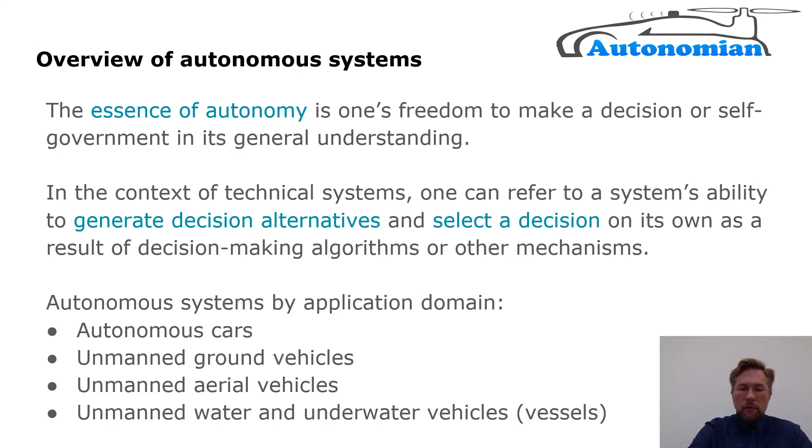First of all, let's discuss autonomous cars, which possibly are among the most anticipated technology currently being developed. Self-driving cars or trucks, in their essence, are those which are not piloted by a human driver, meaning they possess a possibility to make decisions while the car is driving without involvement of the human operator or driver. It usually combines dedicated software, dedicated sensor systems, and control decision-making mechanisms.

The main data processing steps, which is a crucial set of steps to achieve a certain level of autonomy, are the following. First of all, mapping, which is among the most fundamental abilities of autonomous cars or autonomous vehicles in general — its ability to build a model of a surrounding environment where decisions will actually be made and where the future actions of a car will be modeled.

The next point: since cars are heavy vehicles, they are related to potentially dangerous situations for surroundings, including pedestrians, other cars, or static objects like traffic lights, traffic signs, and other objects. So the data should be processed in real time, which means it's a general ability of a vehicle to generate a decision within a certain limited time interval.

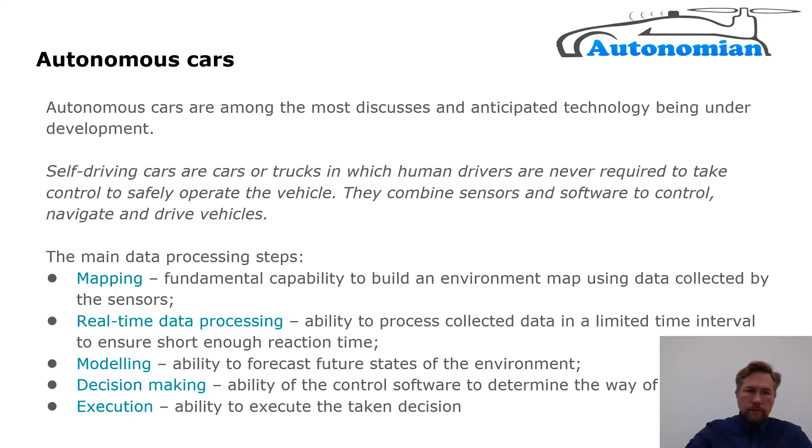Environmental footprint is another consequence of heavy use of autonomous cars, which might shift both to increased footprint due to increased mobility, or decreased footprint due to use of smart grids, energy grids, or shared car services.

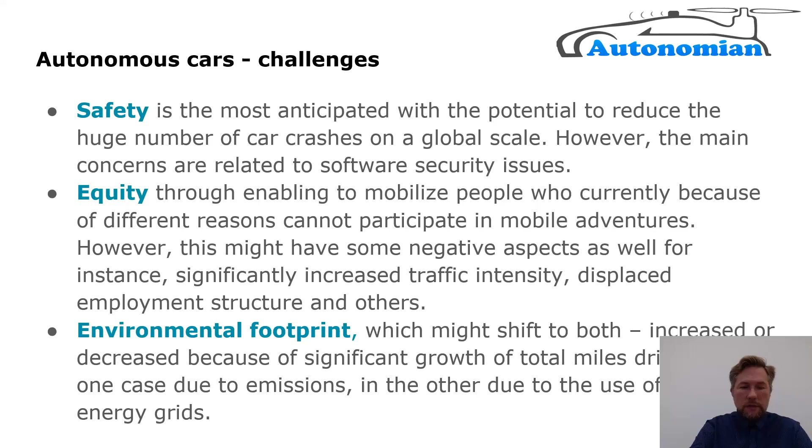Unmanned ground vehicles: generally, we refer to unmanned ground vehicles as autonomous mobile robotic systems. Their typical applications are military operations, which are related to potential harm for human health, and logistics, which are potentially related to monotonous work done by autonomous robotic systems, like delivery of goods within a certain territory or area.

Industrial cleaning, which potentially could increase both cleaning quality and decrease monotonous work for human operators. And agriculture and horticulture, where again we could use mobile robotic systems to increase both productivity and quality.

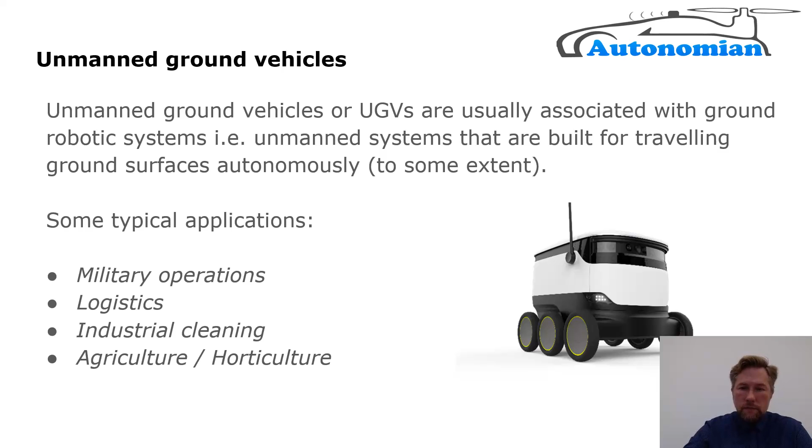Unmanned water or underwater vehicles or vessels. Usually we associate them with typical applications like military, including security, patrol and combat vehicles, and commercial applications, which are ferry and cargo delivery ships, even on an intercontinental scale or locally within shallow waters.

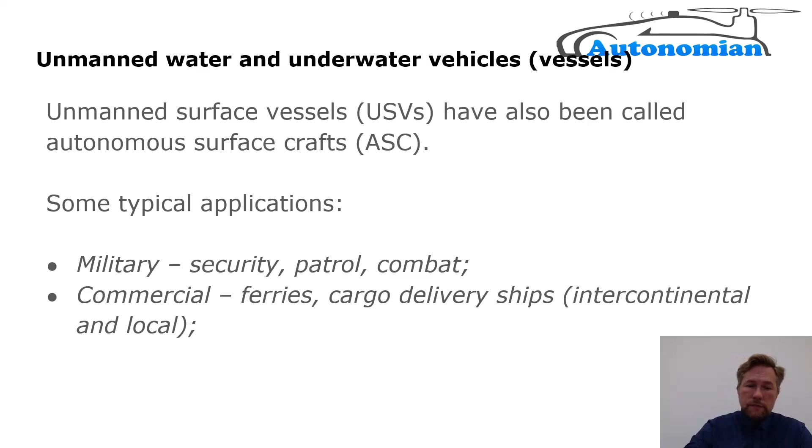Autonomy as a phenomenon is very complex as a concept. We're going to discuss a few of the most significant aspects of autonomy as such.

Due to many reasons, we need to measure the level of autonomy and to quantify it. First of all, depending on autonomy level, the system owner might expect a certain performance or functionality — related to the functionality, market potential, and expectations of the owner or operator of the system. For example, we expect our car to respond in a certain way to our control inputs.

Due to different system applications, regulations might differ, and the same applies to different levels of autonomy. Regulations might be different for fully controlled systems, remotely controlled systems, human operated systems, partly autonomous systems, and fully autonomous systems, which is related to security, functionality, and safety in a wider sense of those words.

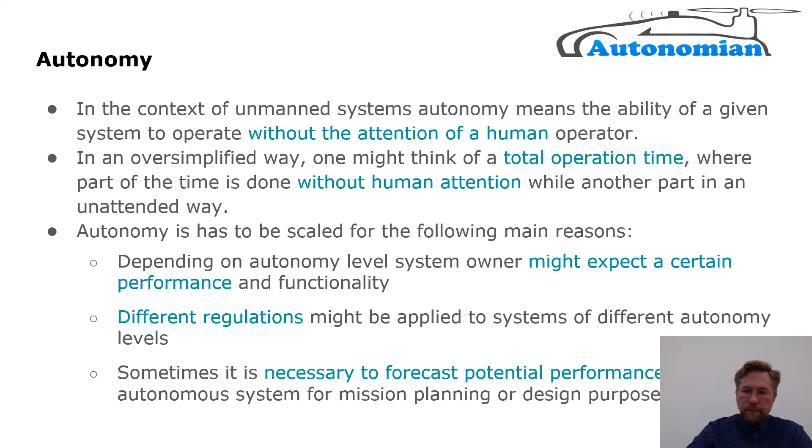There are several earlier attempts to describe or quantify autonomy. First, a model called ALFUS, which provides a framework for combining tests and metrics to assess autonomy of an existing system. By going through a series of tests, we can quantify the level of autonomy and operation.

Performance during those tests is how we assess the overall level of autonomy and performance. NCAP, which is non-contextual autonomy potential, provides a predictive autonomy measure relying on tests before the actual system is used. It means we can examine the system design and system complexity, and provide those measurements as input to assess autonomy before the system is applied.

The last one is mission performance potential, which differs by the following assumptions. The first assumption is that performance does not necessarily increase gradually as autonomy level increases. There are lots of examples where increased autonomy causes a drop of overall performance within a certain mission. So performance of the same unmanned system can vary from mission to mission, meaning the performance under a certain autonomy level depends on the particular mission where the system is applied.

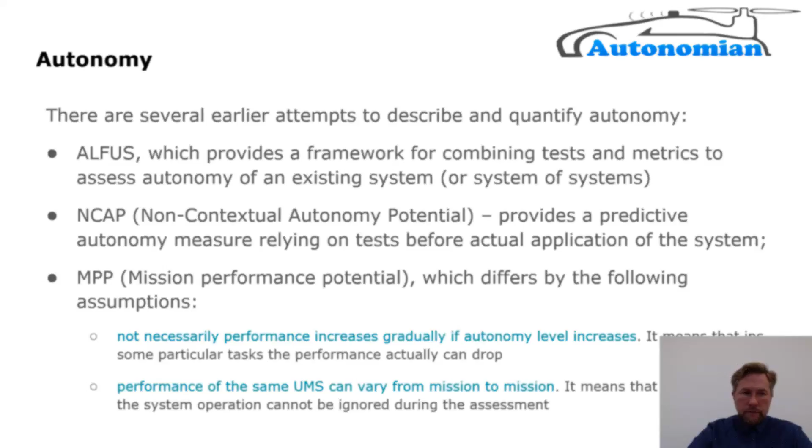There are several organizations which provide different levels of autonomy. The first is SAE, which provides autonomy levels for self-driving or autonomous cars.

There are 6 levels. Level 0 means the overall operation is human operated, so the human driver is watching over the full operation mode of the vehicle, while level 5, the most autonomous one, means the system provides full autonomy and a driver is not needed at all—the driver is more like a passenger. Depending on the particular level, there is a split of functions performed by the driver and those performed by the autonomous vehicle itself.

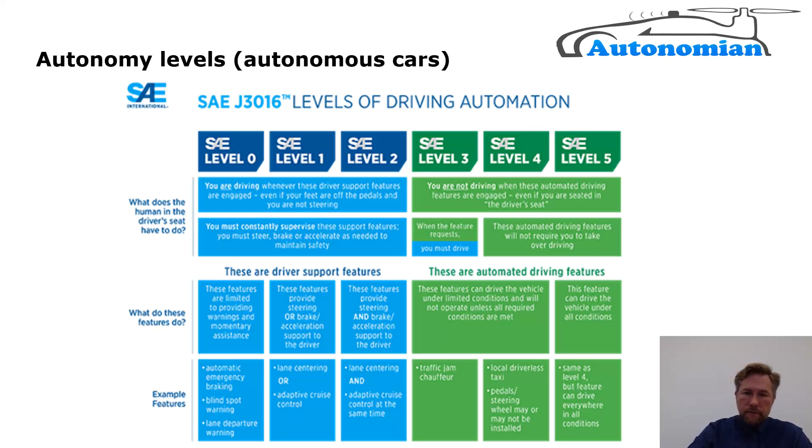In the drone world, there is a different scaling. However, there are also 6 autonomy levels, which also start with no autonomy, meaning the vehicle is driven or controlled using remote control units at a distance by the pilot or operator. The fully autonomous mode means that during the whole operation time the system makes decisions on its own, and the drone is fully autonomous, requiring zero attention from the human operator.

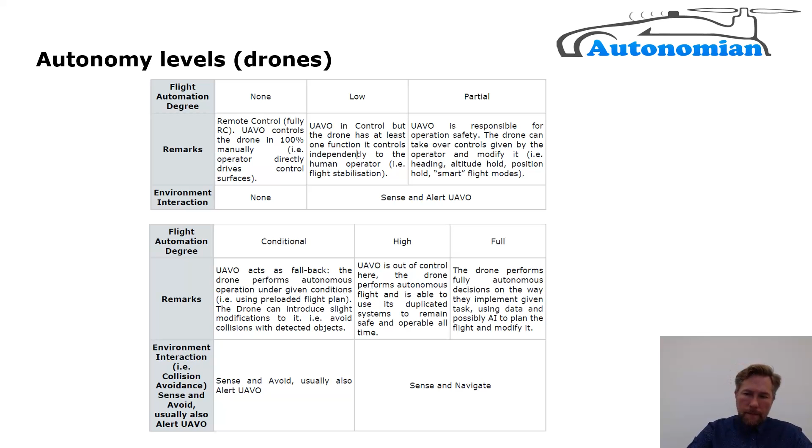Safety. Unfortunately, currently none of autonomous technology is ready for wide acceptance, mainly due to safety issues, safety challenges, and sometimes safety acceptance by the public.

First, why safety is needed and what are the most anticipated aspects of safety tackled in the near future and currently. There is a specialist group called the Safety of Autonomous Systems Working Group, SASWG, that has identified the most significant safety challenges considering the following aspects.

First, domain-specific expert opinions on high-level issues within the domain, meaning that within certain domains of application, like logistics or military operations, specialists have not agreed on safety procedures, safety regulations, or safety issues, which slows down technology development and technology acceptance.

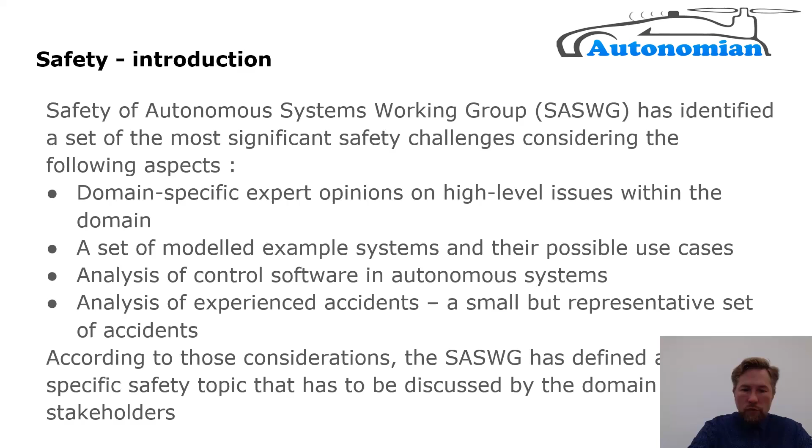Each domain, application domain of autonomous system has its own safety challenges. First of all, air, which is among the most heavily regulated domains.

Unfortunately, the current regulation is too heavy for autonomous systems, and it really slows down the overall development. The current experience is not directly transferable to autonomous systems, where human in the loop is in a very limited amount, while in the existing regulation, human in the loop is a heavily essential part of the whole safety procedure spectrum.

Therefore, very challenging is interface and communication to air traffic control systems. Currently, air traffic is monitored and controlled by humans. Unfortunately, autonomous systems cannot communicate in the same way as human pilots, and that's why the communication itself with control centers is very, very challenging, both for controllers and for the system developers.

Third-party risks, which are related to software updates, protocol updates, inconsistencies of the software, and so on and so forth. Due to those software updates, there might be a risk of new software bugs or inconsistencies appearing, which might lead to safety compromising.

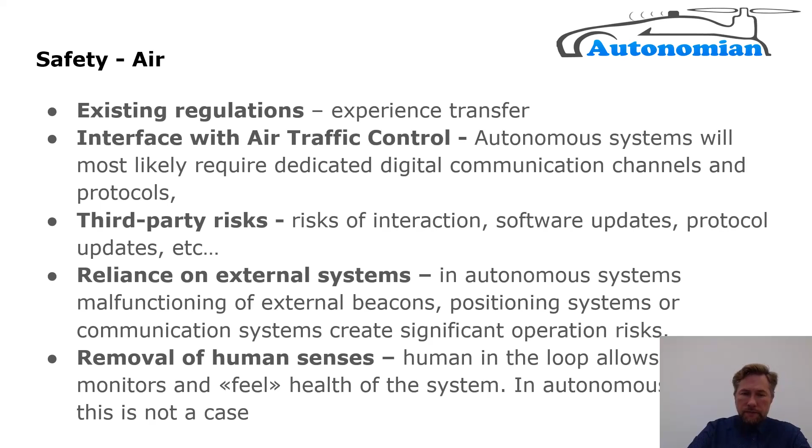In autonomous driving domains, there are a little bit different risks and safety issues. First of all, assuring driver readiness.

Due to different modes of autonomy where the autonomous car may operate, switching between or among those different modes means the driver needs to be ready to take over control under different situations and different autonomy modes, which means it actually requires a constant level of readiness of the human driver to be involved in the control loop.

Unfortunately, it is not always possible, since the human driver is not always aware of the current autonomy mode, and going to another autonomy mode means a different behavior and involvement of the human driver, which is very challenging. So if we constantly require being ready to be involved in the control loop, it means the human operator actually participates in driving throughout the time of driving. So the autonomy itself is lost, and attractiveness of those technologies is lost.

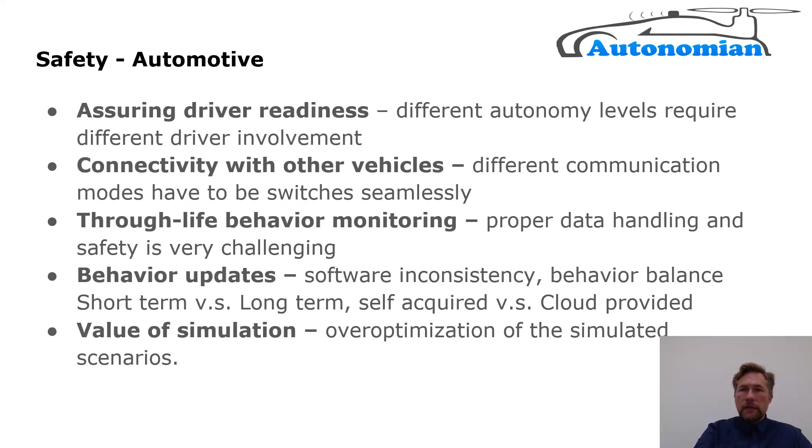Safety in the defense and maritime domains. Besides all mentioned, there are certain additional challenges.

In defense, there is always a bias between mission completion and safety. There might be conflicting goals or requirements for completing the mission, which might lead to destruction of the system itself and compromise safety. So it needs to be assessed which of those biased consequences have the highest priority for a certain mission, situation, or level of autonomy, which is also an open and very challenging question.

Technology acceptance: since the military and defense domain itself is related to potential loss of human lives, technology acceptance and reliance on technology is essential and crucial. Currently, the question of how to increase technology acceptance among military or defense personnel is an open question.

In the maritime domain, there are certainly some additional challenges. First of all, long communication paths, limited due to distance from the coastline where autonomous ships are traveling, meaning there is a limitation to the bandwidth accessible by the autonomous ship. Overall, real-time monitoring might not be possible for a certain use case.

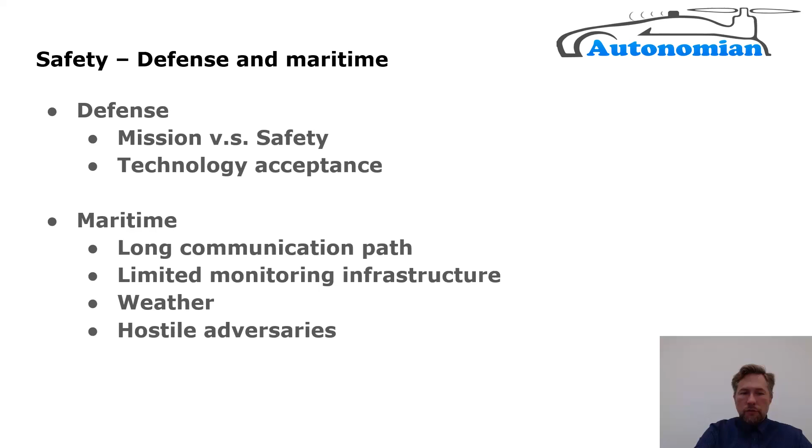And at last, hostile adversaries, which is part of the maritime domain experience, even a recent experience during the last few decades, is still an open question, and it's very hard to ensure proper control over a vessel during those adversarial encounters.

The next topic we will cover as an introduction here is ethics related to autonomous systems. Why are ethics important? First of all, we develop technology faster than we can understand the implications of its application in masses. This means there are certain implications, due to different reasons, that we cannot forecast, including changes in our society due to the introduction of autonomous systems.

We interpret applications according to current social and moral frameworks, which for a certain time might seem static. However, involving things like artificial intelligence, heavy data processing, and autonomy as a phenomenon might change it dramatically. Unfortunately, it's very hard to anticipate what those changes are.

We also develop technology faster than we develop and implement legislation and policies, both global and national. Currently, there are technologies ready for autonomous operation for certain use cases in certain domains, while legislation and policies are not there yet.